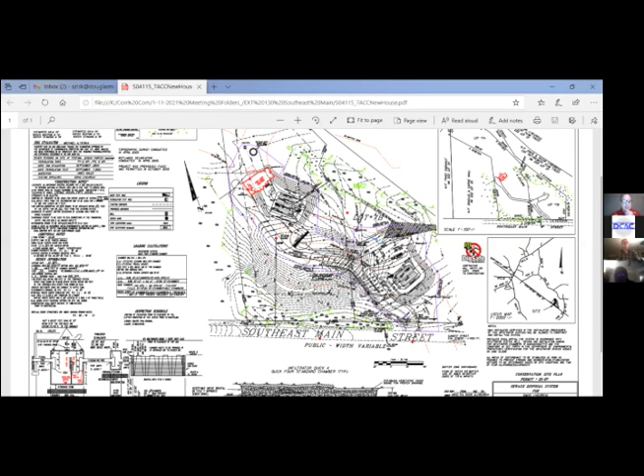And then Steve, your question? Yeah, so with this order, let's see if I can screen share. All right, is the plan showing on the screen? Yes. So there's actually 2 properties here.

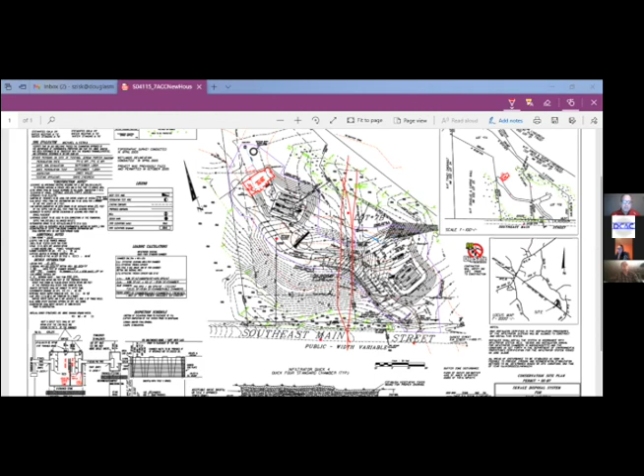You can see this line here, so there's a line right here. There's a property to the right with a shared driveway that comes up, and this to the right is the one where you just granted the extension. And this house here, when they did the permit - Margaret's not here to explain it, but basically they just did a box. They weren't sure what type of house they were going to build.

So I think everything else is staying the same, but instead they want to - here's the 50-foot buffer - they want to move the house, rotate it, and extend it a little bit, and build this type of house that's in red. I think what's hashed under that red was the original proposal. Let's see if I can highlight it. Wrong color - there's no additional grading. This is what was proposed before.

Do we want to know if she's going to be on tonight? I don't know if she's going to be on. She knows about the meeting because I asked her to attend, so maybe we can hold it off until later. Yeah, because we need to - I'll email her, I think.

What did you find? It seemed to push a lot of the impact towards the wetland with the driveway and the grading. Yeah, they're staying outside the 50-foot buffer, but there's no proposed change in the grading, so I don't know if there will be grading or not. Looks like a garage underneath, but she'll have to state her case if she wants it to be minor. We can't guess what they're doing because it looks like she just overlaid the red print - there's a garage under on the left side, but we can't tell just by looking.

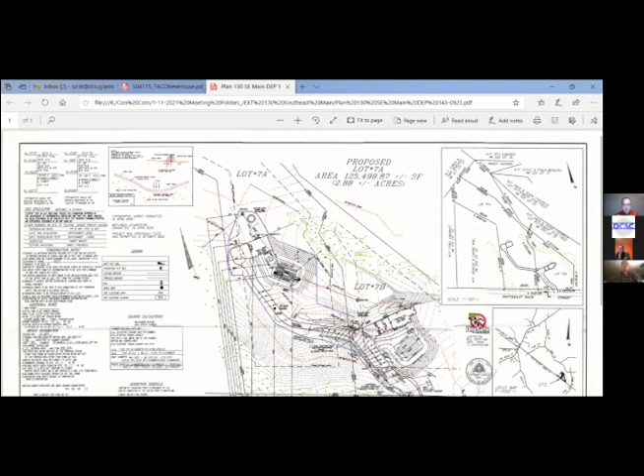Because it looks like she just set the new shape on top of the old shape. Here's the original plan - so it looks like they just moved it into this driveway area, and the driveway is smaller now. I think they put in a retaining wall - yeah, we'll wait. I'll email her to see if she can show up tonight. We'll put her at the end.

Okay, next one, certificate of compliance, 56 Lakeshore Road.

Steve, update. Are they here tonight? This was approved, I don't see him. Yeah, if I can speak up, can you hear me, folks?

Name and address. Hi, Robert Moran, I am a new owner of 56 Lakeshore Drive. Oh hi, how are you? Good, thank you, Madam Chair and members of the commission.

Steve, we talked a couple of times before and exchanged emails before we purchased. I'm new to Douglas, and this was a complicating factor to the purchase, but we worked through it. I'm here to attest that I saw the folks do the work, the guys out there with the machines, the silt fence and silt socks, and it looked professionally done. I'm not a trained engineer though, actually an electrical engineer.

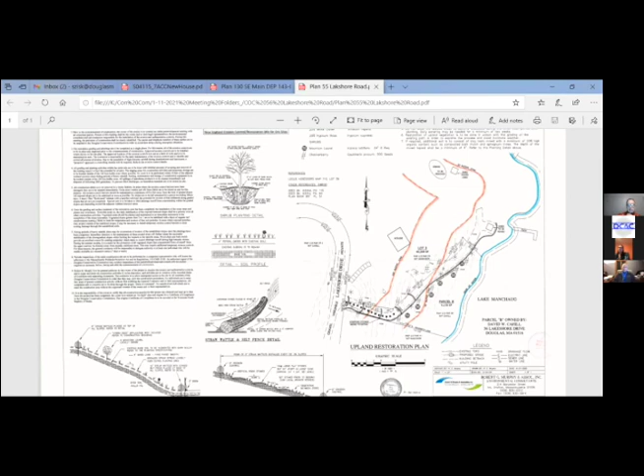Okay, thank you. Steve, did you request it, Bob, or did the owner request it? So you're the proposed owner, right? I am the new owner. You own the property. I do, I own 56 Lakeshore, and I believe there were orders on 56 and 55.

Is that right, Steve? Right, so I've got the plan up on the screen now. I think the Cahills must have just switched it, because they requested a certificate of compliance a couple weeks ago. I took some photos on this parcel, parcel B. I went out there and I have photos I can show. It looks like they did everything, but two things the commission usually asks for are an as-built and stabilization. Those were the two outstanding issues when I explained it to the Cahills.

Can you see the pictures on the screen? I also think the big thing is if we issue a certificate of compliance, that means the erosion controls can be removed. But you have to think, would any erosion occur? There's no grass growing, obviously, because they did the work in winter. And there was no as-built. So those are the photos I have.

Board, do we have any questions? Just real quick, is it Lakeshore Road or Lakeshore Drive? Drive. Is it Drive? Was there a road listed? Yeah, it's Road on the agenda but Drive on the plan. I think Drive is correct.

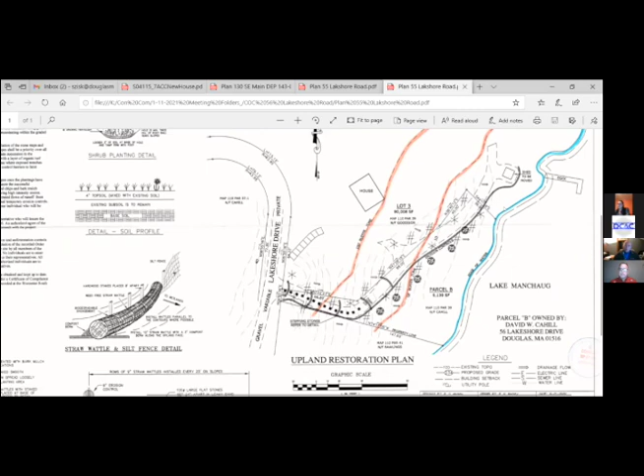I'm just looking at the plan. There's two different spots. All right, so that's got to start growing before we can issue our certificate. I defer to the commission. That's why I'm here, to just kind of be an observer of it. And it's in my interest to see grass growing there too.

Maybe middle way through springtime, give Steve a call if you think it's good, or send him a picture, email him a picture, and then we can revisit this and get you taken care of. So you can get all the erosion controls removed and all that jazz. Fair enough. Okay, thank you very much.

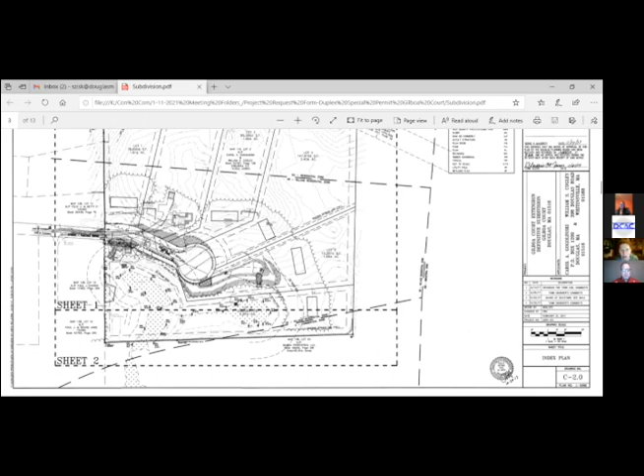Well, let me bring it up for everyone. To make it a little bit cleaner, they would file individually for those 2 bottom lots. Right, and they'd have to show, like, maybe I just don't see it. I don't see the buffer zone. Oh, maybe, there it is. Okay, so this, the one I have open, shows the driveways and what looks like the septics.

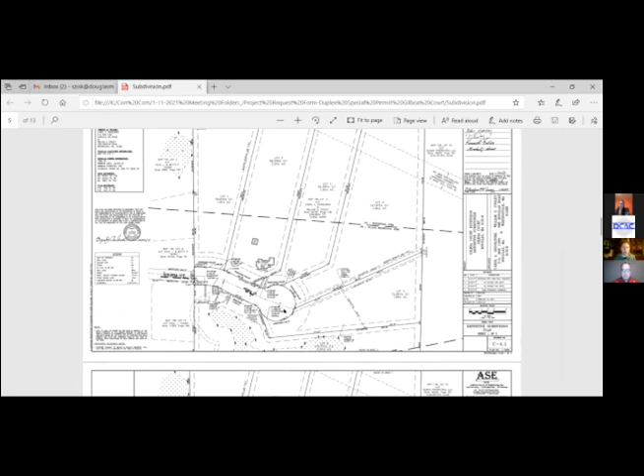There's an old plan that just had the roadway within our jurisdiction, and then you have the proposed house locations. So this one I've got with the houses and driveways has the septics outside our jurisdiction. Correct, yes.

No, that's the old one, but the old one does have driveways on it too. I've got the file in the Google Drive called duplex site. Yep, that's the one, bottom right. Yeah, this one.

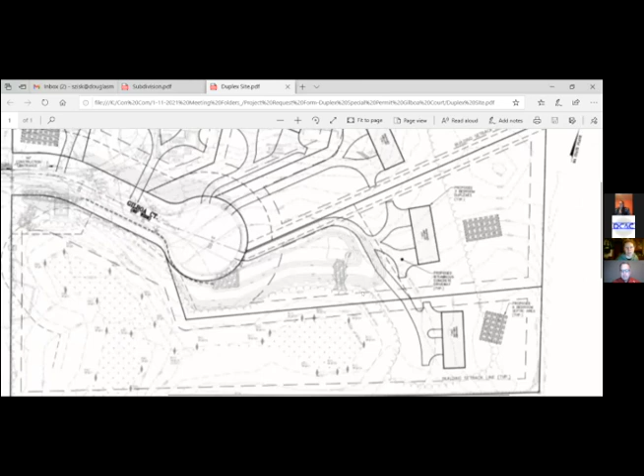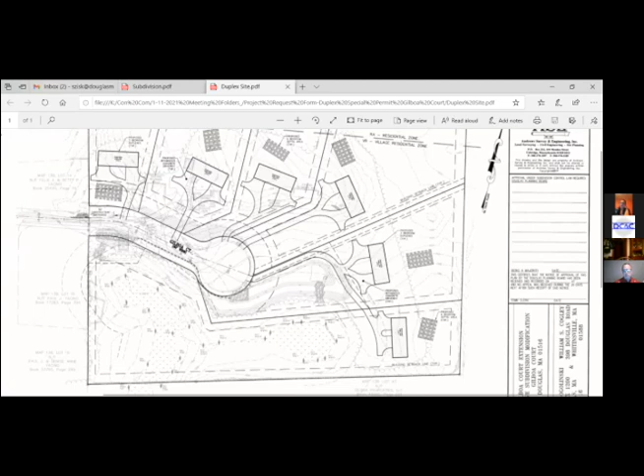So they've got septics, but they're outside of our jurisdiction. Just the fact that they're now showing the septics is new, we didn't have that before. Well, the subdivision, when they filed, even though they showed the houses, that was just for planning purposes, not permitting, because it was for the subdivision. Those houses approved under the conservation order of conditions for Gilboa for this project was for the street only. None of the houses, even though they showed on the plan and the plan was approved, would be exempt - they would still have to come back for each individual house if it was in the jurisdiction of the commission. So if this house in the bottom right is a single family or a duplex, they would have to file with the commission regardless.

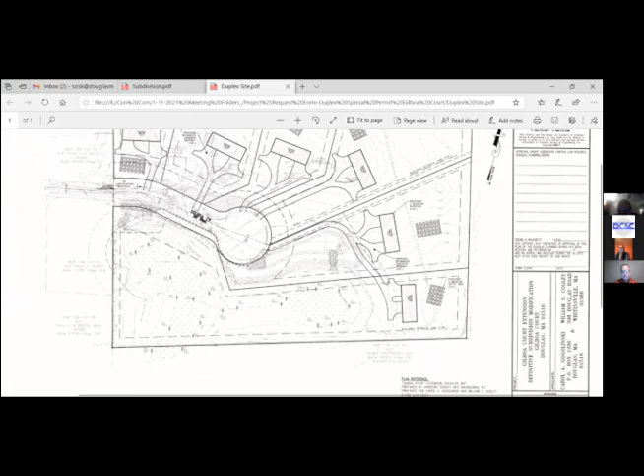So on the titled subdivision PDF. Okay, so Steve, you'll fill that out for me? Yes. Okay, moving along, picket fence.

I think they have, it was just the application. I think they're filing because it's hard to determine - I asked for more information. I think they put it in for the concrete patio that they poured. Right, so it's in the aquifer, right? In the aquifer, but I looked at the Google Maps aerials and it looks like it's outside the riverfront area, outside any jurisdiction of the commission.

Okay, so I don't see a plan. I didn't see a plan, just the application. Yeah, so it's really tough to see anything that's our jurisdiction if we don't have a plot plan. Well, let's see, I think - did I email that to you? Let me go check.

Okay, rendering impervious more than 20% of the lot area. Let me go on the GIS. Well, I really don't like to go on the GIS. We can just say if this falls within the riverfront or the buffer. We can't be looking things up and guessing on plans. I'm sure there's going to be a plan submitted to the planning board, right? You can say that, yeah - any work within jurisdiction of the commission, they need to file. We have no plot plan, so we don't know where any of the districts are or the resource areas - resource areas unknown.

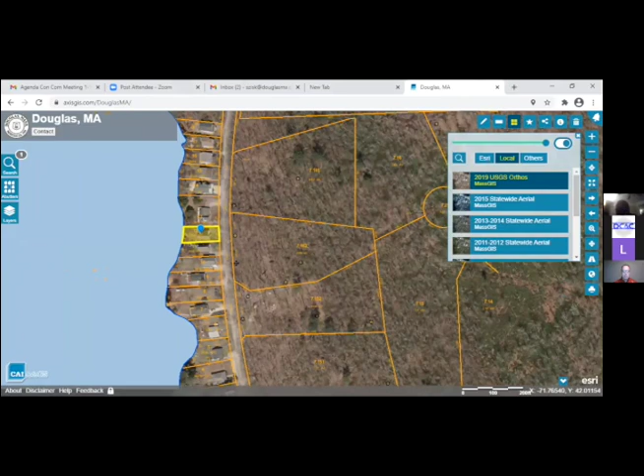Happy to meet you down there for any inspections. We were going to patch the process to repair the driveway. We're obviously building roadways on the solar site, so we were going to use the same material to patch the area of the driveway, pack it down, compress it, and create a bit of a berm to prevent any washout going down there again.

We can put a silt sock or one of the straw bales down there to prevent anything going down, just as best practice. And then just obviously clear up some of the sediment that had washed down onto her porchway.

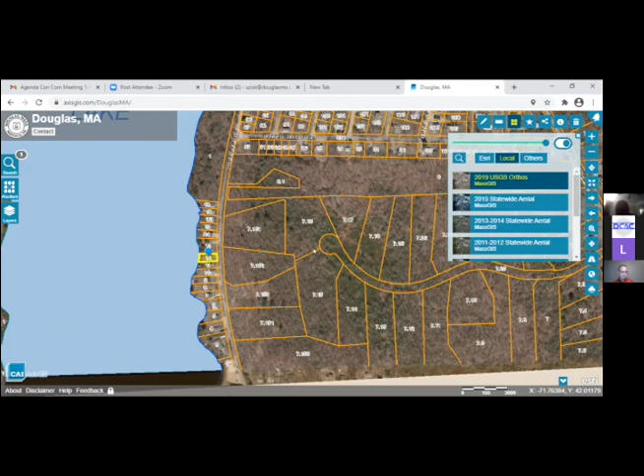So is this GIS up on the screen? Yes, so this is where the solar farm is, and they have it mostly cleared. Right after we had the large snowstorm earlier in the year, and then we had the 3 inches of rain, water was just pooling down Shore Road here.

And this area that I have highlighted is the person's house, which is probably at the low point of Shore Road. So water was just channeling down here and then took a right down into her driveway.

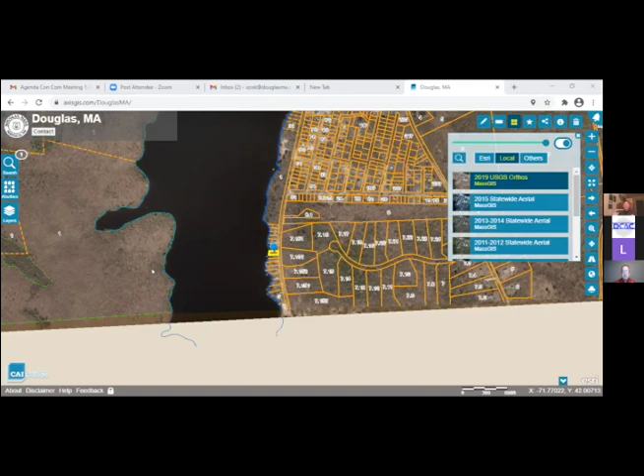Is this photo showing up now? No, we're still looking at GIS. All right, hang on, let me bring the photos up. I looked at the pictures in this file on the Google file, and I watched the small video. Yeah, so this is Shore Road, and then the water came down here, and it just eroded the house, the driveway out.

So the question is, can the gentleman from the solar farm, who is willing to come work with the town engineer and the highway department, just kind of repair this driveway? And so the question is, can they just go ahead and do it, or do they need to file anything with the commission? The car here is probably within the 100-foot setback, right where the car is.

I would say repair work should be handled without the need for a filing. Right, that's what we thought, but we just wanted to make sure the commission was aware of it. Nope, but I would also ask.

What is being done to keep this from happening again? I said, what can be done to keep this from happening again, or is it because the erosion protections within the solar farm were not installed as of yet? They've been installed.

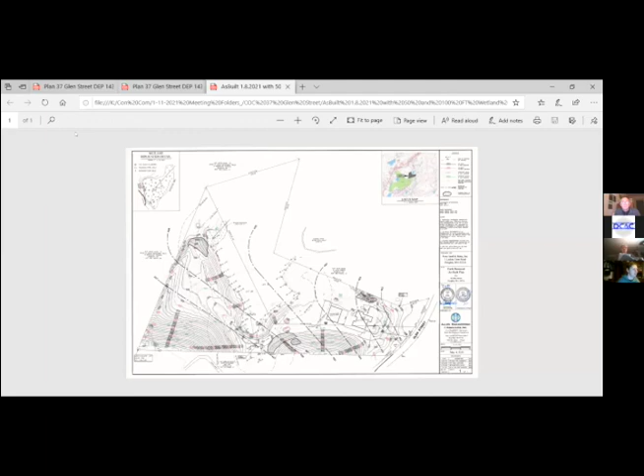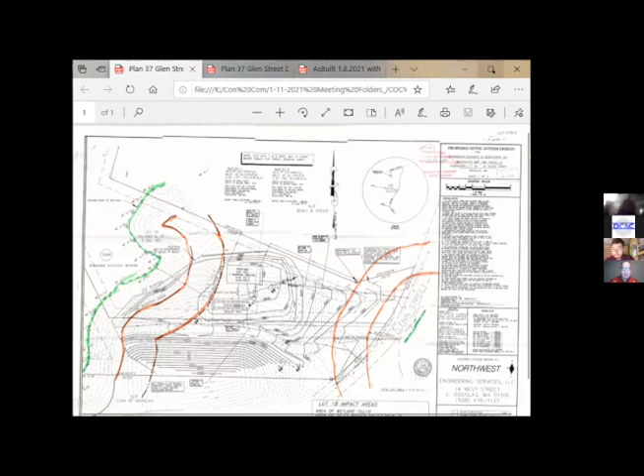Yeah, so let me bring up, see if I can bring up both plans, all three plans. Hang on. I hope this works, let's see. Okay. Can you see the plan on the screen? Yes, let's see if I get rid of the photo. I can. Yeah, okay, so you have this, I have this. Is this 748 or 749? This is 7, let's see. Let's see.

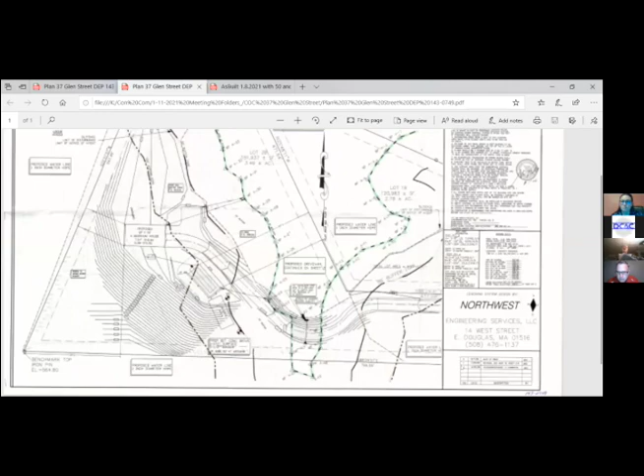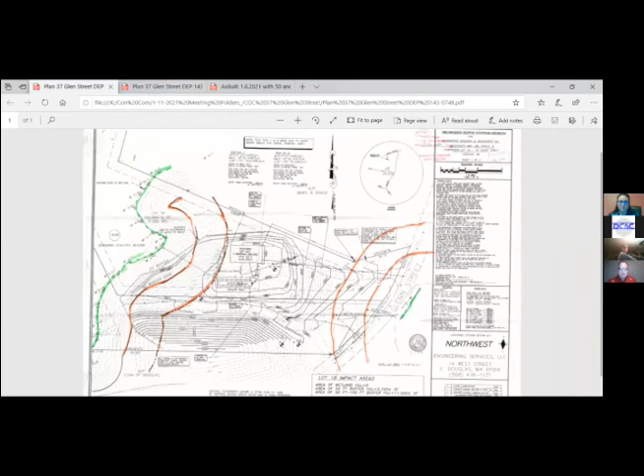This is 749, so this is 748. Here's Glen Street. Originally there were two plans: one for this house here for 748, and then there was actually a long driveway that comes back all the way to the back.

Which is this plan. They were gonna put a house way back. There's a little crossing here, and then way back into the lot at 749, there was gonna be a house. And if you go out behind the convenience store, there's a solar farm.

That's over here, that's what this area is, the old gravel pit. The owner combined both of these lots. They never built this house way back here. So they combined both lots, built the house in the front, took the gravel from here, reclaimed it, and built the replication area back here.

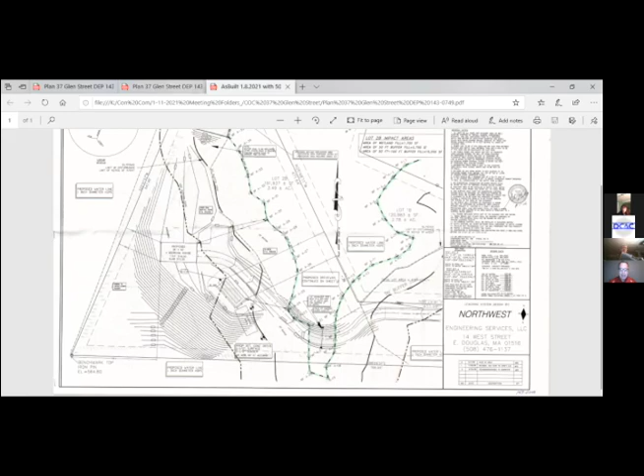So they're just gonna leave this all as an open area, and that's what this as-built shows. This as-built is for both lots, the first lot here, and they kept everything outside the 100-foot buffer. When you see my photos, there was a proposed house back here—they never built it. They took this hill down, restabilized it, and did the wetlands back here.

This is where they withdrew when they came in about a month and a half ago. They wanted—there was a little ungrown natural area here in front, right by the road. That's what the RDA was for. But they already had a couple order conditions.

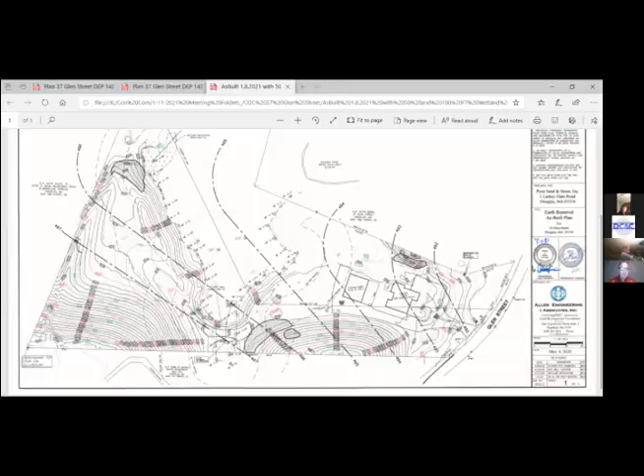So let me bring my photos up. These photos were taken sometime in the fall. I'll just kind of go through them one at a time.

So this is the beginning of the area. This is that area that they filed the RDA for today, that they just withdrew. We're going to keep it in its natural state.

This is the beginning of the road, that's that area. Are you going to double click on that? We can't see what you're looking at, we just see the thumbnails. Oh, it's not loading, sorry. That's okay. You see it now? Yep, there you go, alright good.

So this is that area that the RDA, they just withdrew. This is the beginning of the house. I'm gonna go through it. This is the construction inside of the slope right here.

This is the area, so they put a little area for the horse area. Everything else is stabilized. The side slope, they got riprap along the bottom. And now I'm coming down into this area where they had just a tiny little area of a wetland that they crossed.

This is where that second house was gonna be back here that they never built. This is the side slope of the wetland area. So this is the big slope in the back of the property. The house is gonna go up to my right.

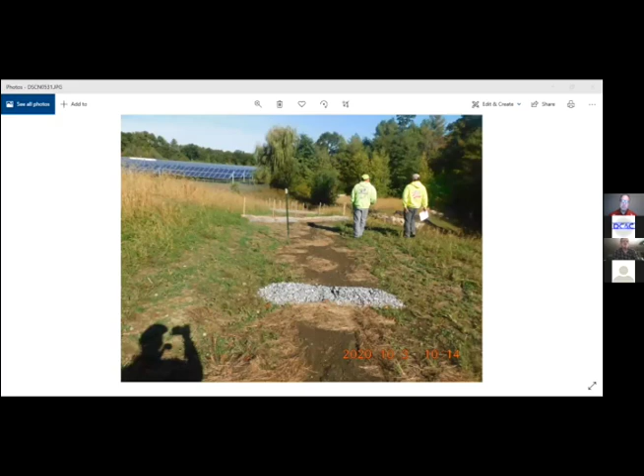This is the gravel pit behind the convenience store. Douglas convenience store is right here. That's that solar farm. This was done in October, so they put some check dams up here to help stabilize any area that was eroding back then.

And this is the replication area, and they had the plantings that were planted here, and the vegetation came up naturally. It was a low-lying area, there's a wetland back in here. And here's a look going back off towards where the other second house is gonna be—they never built it.

And so that's the entire site. I'll go back through them real quick so you can kind of see. Anytime they had an erosion issue, the owner—Adolphinese, I think, is one of the owners—he used to run a hydro seed company, which I was very happy for, because he was on top of the place and really did a great job keeping it stabilized.

What's your opinion of the work, Steve? Does it look good? It was great. I'd go out during the heyday every week, at least weekly, when they were stabilizing it, and anytime I had any questions they got right on top of it. So right now it's really well established. And is the mitigation area the size that was proposed and looked like it would be? It looked good—what was nice is that it was already growing.

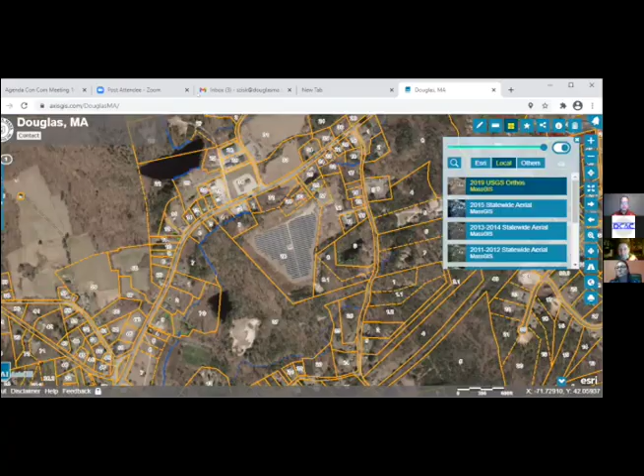And that open space that was reseeded with grass, was that all part of the plan that was going to stay open? Yes, it was supposed to be the second house lot, and they combined both lots, so they got rid of the potential of putting a house back there. No, I get that, it's just not knowing what the original plan was.

It just seems like a very large area of disturbance, just trying to get a handle on it, I guess. I think they took the gravel. Right, they wanted the gravel, and then they proposed the house, and they were going to put the house back there. And I think the owner of that — right, and I feel like, so I'm approaching this the wrong way, but when you're dealing with a gravel pit, the idea is when you're done, you restore the space.

And I would just expect more trees — this seems like an awful lot of grass. But if the original plan was to put lawn and driveways and other stuff in instead of replanting, then that's what the plan was, and that's what was approved, and then they're in compliance. Well, I think they might be putting horses back there to pasture, so they'll use the flat land for that.

Yeah, at the end of the day, it's not what I would expect, but I didn't see the original plan, and as long as it's compliant with the original plan, then we're good. Without a doubt. We've gone through planning board and everything, and we've got sign off from Bill and that group as well.

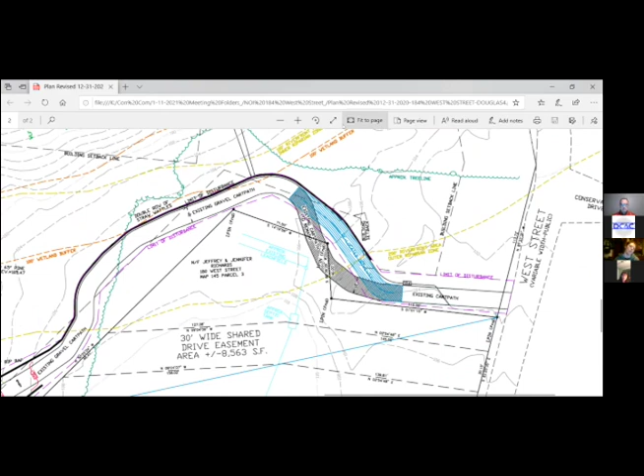How much riverfront area disturbance do you have? The riverfront area is on there, it's in like a gold yellow color. That's the 200-foot outer riparian, and the 100-foot is the other yellow line. The wetland line is in orange, the hundred-foot buffer, I mean. The wetlands themselves are in green. Good, yeah.

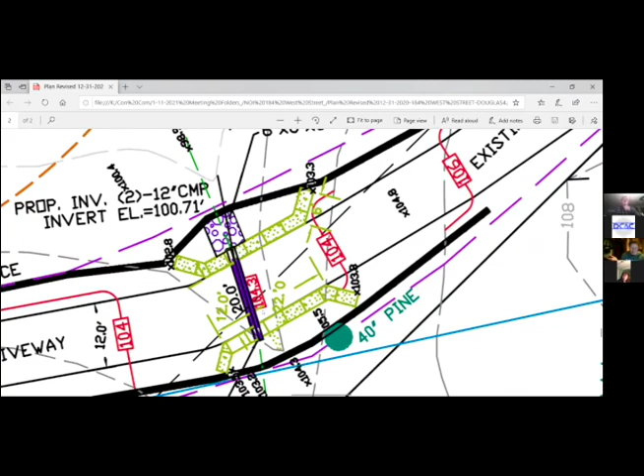I walked the site and this looks like what I saw. Sorry, just to clarify, is it one or two 12-inch pipes in there? Two 12-inch pipes, side by each? Side by each. There you go. Well, okay, so I see only one line on the diagram and my brain was like, did she put one on top of the other? I thought that was crazy. But I thought it was really nasty, wide line. See, there's two. I just be like, look, there's one on top. Yeah, I just thought that would be crazy, but I don't know. People do crazy things sometimes.

Okay, perfect, great. Okay, so, I'm just thinking of it. You don't think there's any issue of those being blocked? I just have this fear that if the water's coming through there, and I know it's not fast, it's a swale of water, it's not just going to push a pile of pine leaves in there and get it clogged.

I would hope it doesn't. I mean, we all hope that. But, what would you propose? Would you propose a little bit of riprap before it? I would actually, I can do that. As much as I hate riprap, I feel like this is the place where it's appropriate. I'll agree with you, there's pine needles there, quite a bit of them, and I'll entertain that. Okay, board, anything else?

The applicant proposes this is a swale. What's the difference between a swale and an intermittent stream? It doesn't have any vegetation, and since the last filing in 2003, the hydrology has changed out there, so it's no longer an intermittent stream at all. It doesn't hold water, it doesn't have a true stream channel to it. It's got more like a drainage channel, like you can see where it's just eroded the soil as it's gone down, but it doesn't sustain that.

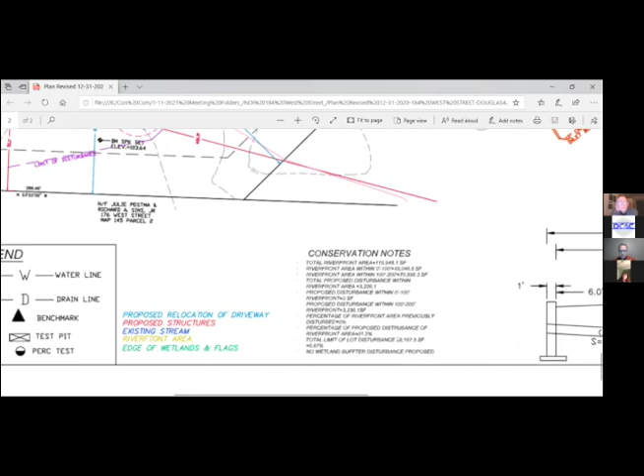I think it was on our comments last time—did you put those calculations on the plan? I did, they're right there on the bottom. So what's the percentage of that? The percentage is 6.87% disturbance. Oh, right here, okay good. So just so the commission knows, the most you can disturb is 10%.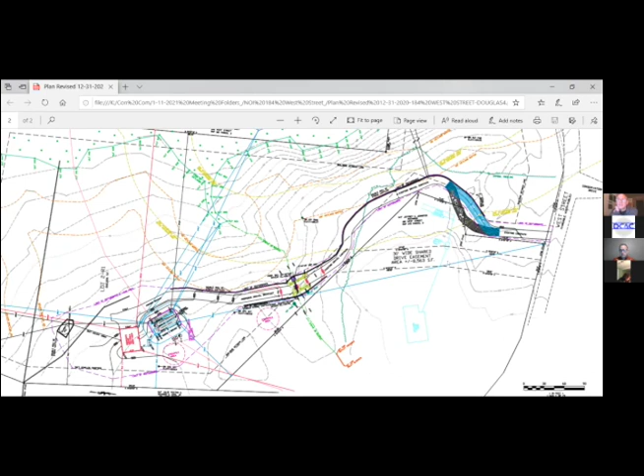Has there been a check to see if there's any species or habitat issues with this? There is habitat. We filed with them and got notification back that they're okay with this plan. They're good with the plan.

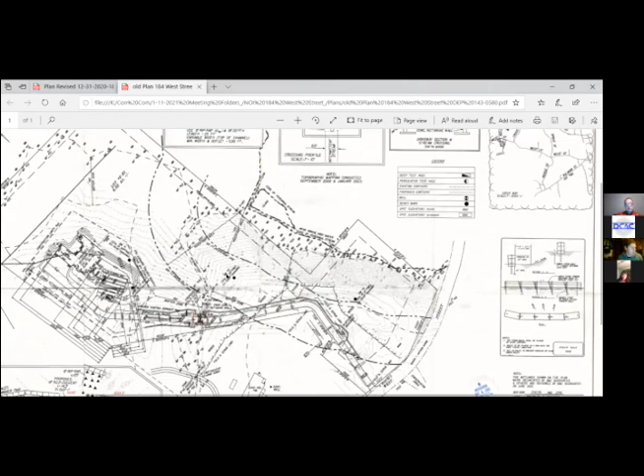So there's a corrugated metal pipe that crosses somebody's driveway. It has been crushed and you can't even see the inlet to that corrugated pipe. It's on my plan in red, I located it, it shows that pipe. The inlet to that pipe is completely blocked, you can't even find it.

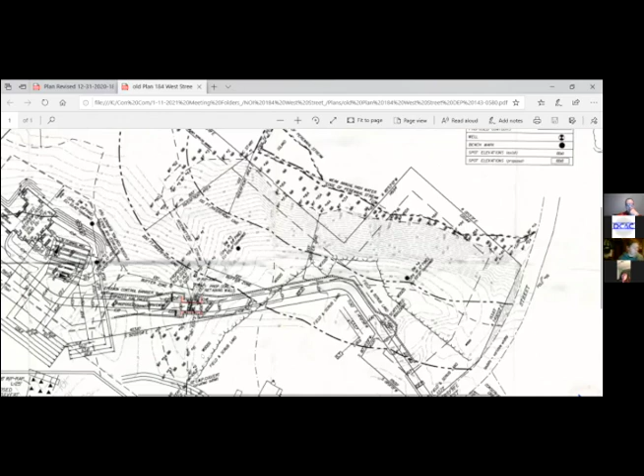What's on the other side of that inlet is pretty much like a pile, almost a man-made area, and that's where that water is coming from. It's like people have pushed the earth one way and pushed this backyard another way and created a wetland up there. There was probably a much bigger wetland up there at one time, but it has changed over time.

Yeah, I mean, it's the intermittent stream they have on the plan, labeled down gradient, because I colored the old plan. I don't know if I could, let's see if I can color it.

So they have the wetlands right here, big, right. And then they have a wetland that kind of comes like this on the old plan. This area here, on this plan, they're not calling that a resource area.

Because this is F6 here, it's almost like the flag stop. It's hard to see it because it crosses an existing cart path. So it's hydrically connected.

For me, it's hard — I didn't really notice it when I walked out there in the middle of summertime. I walked through this area and did not see that this was a bank I was climbing over. It wasn't until I got down into this wetland and walked up that I noticed this was eroding, and then through here.

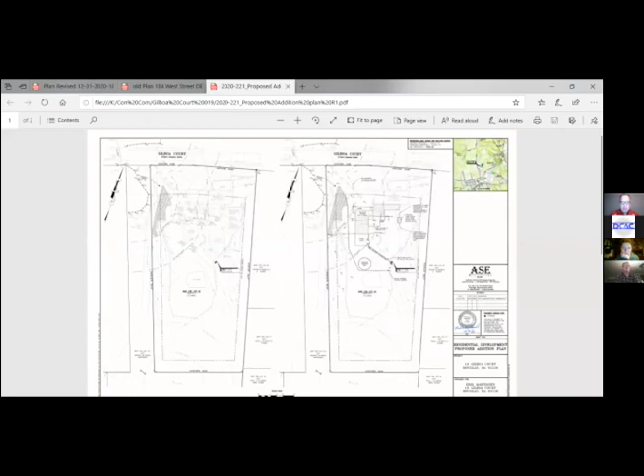Is this it here? Let's see this. Does this look like- yes, that's the revised one.

Okay, so do you want to just summarize the changes that you've made with our comments from the last meeting?

Yes, so continuing from last time, we didn't have a DEP number yet. We have a DEP number now: 143-1006. We also added flow lines to make it

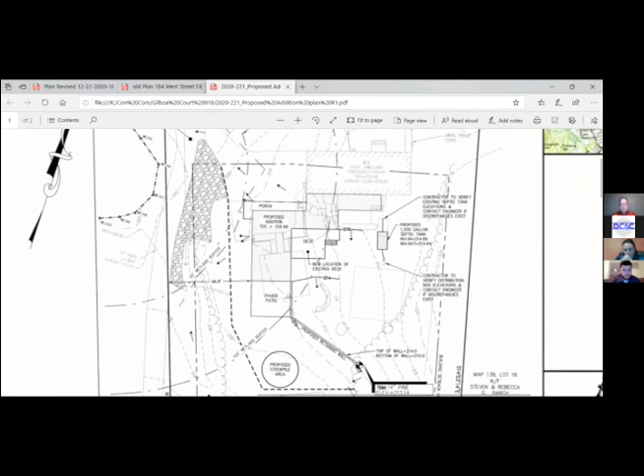a little easier to read where everything is actually flowing. The driveway continues to flow in that same direction as before, really once you get past the porch. I explained it last time, but now we can actually see it. Everything will flow to that southwest direction from the proposed addition.

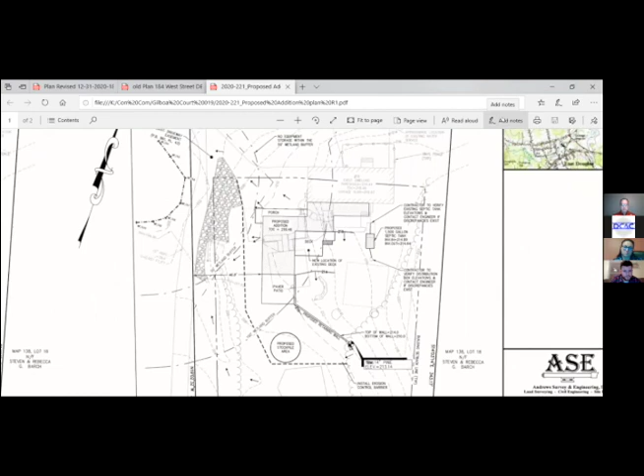You can see it flows to that HDPE pipe down at the bottom of that riprap. In the bottom left corner of the plans, you can see the swale where everything will head towards that pipe. Also, when you look at it, it makes it easier to tell.

I know there were issues, or you just wanted me to bring to the attention of Rich, the PE, about making sure that from the proposed addition, no runoff will be going towards that addition.

With those proposed contours, you see that 214 and 216, the 214 on the deck, yep, right there. All of that runoff will be going down towards there. The top of the wall there is at 214 of that retaining wall.

And at the bottom, you can see the 212 where we have the proposed line, right back where that benchmark is, that goes at 212. So everything will be moving down the backyard.

And then when you see the existing contours moving west or southwest-ish, they all flow towards that swale in the bottom left, and everything will go down towards that pipe and into the wetland.

We also added that stockpile area that is outside the 100-foot buffer. It's right there. And we moved the erosion control backwards just so it would cover past that proposed stockpile area.

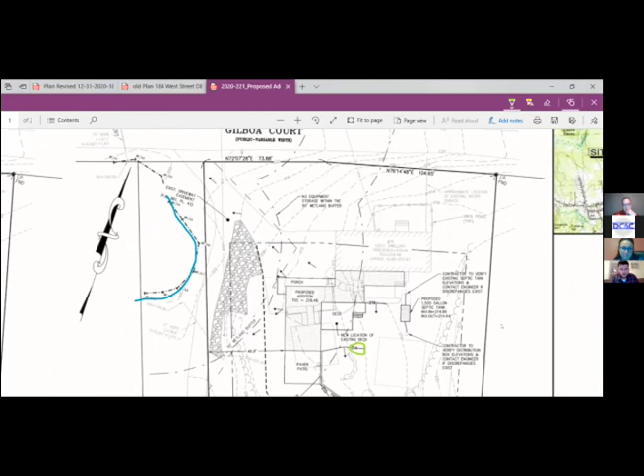Let's see, what else? You also, I had the net impervious previously, but you wanted an actual breakdown to show what the existing impervious area is within the 100-foot buffer area and what the proposed is. If you look at the top right of our plan, I actually highlighted the existing conditions and the proposed conditions with a net of 415 square feet.

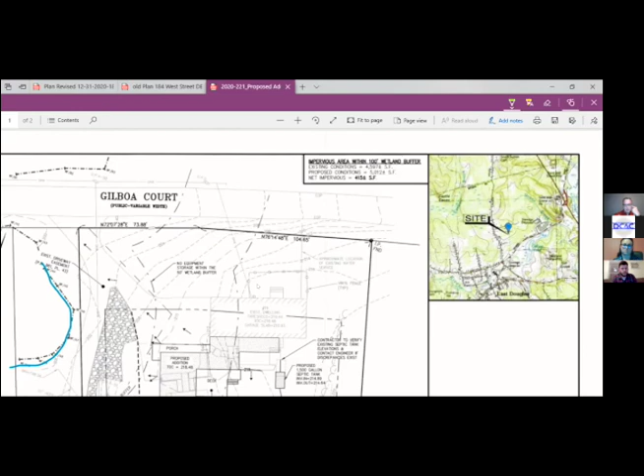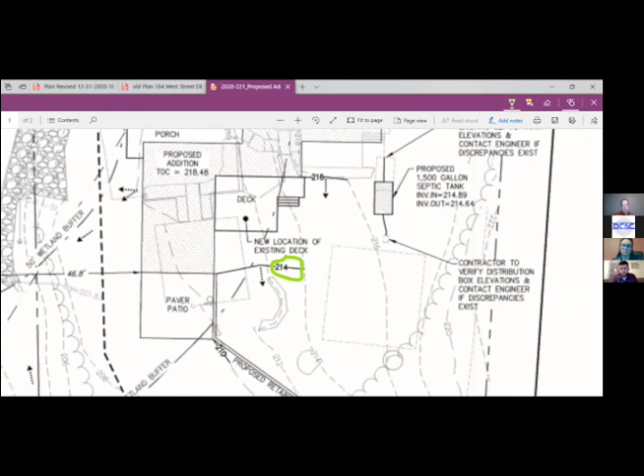In that net impervious, I know we discussed possibly using a CN number for the patio area because there may be some pervious area, like the cracks in between. After talking with the client, we wanted to make sure we were conservative with our net impervious area, so we called that at 100% impervious for now, just to be conservative with that.

And that's basically, now that we're at the 415, the area of that patio within the 100-foot buffer is 429 square feet. So with the nets, everything else within there, there really isn't any net impervious due to that basketball court and the walkways. We're taking that driveway area out where the proposed addition is in the porch, so really the only net impervious is just that paver area, and that's also a conservative number for that.

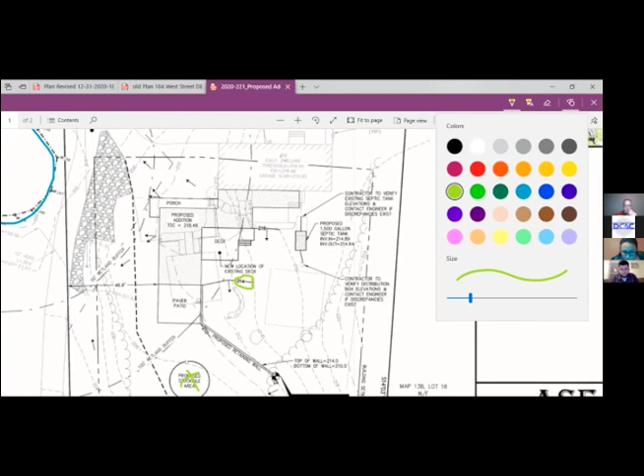That 400 net impervious, just due to us not exactly sure what he wants to use, we figured we'd just be safe with that. Other than that, from Tracy, from your checklist that you gave me last time, I think that included everything.

He was gonna do a video on this one, wasn't he? Really? Did I do a video? We talked about it the last meeting. Was I going to do a video? No, maybe I was, Steve was. He can go really fast with the pictures. No, I don't have a video on this. Only one person got that. No, that'll do.

No, I have that in my notes, sorry. I got the photos.

So board, let's go. Could you pull up the plan one more time, Steve? After you're done with the pictures, if you want. So the proposed erosion controls during construction.

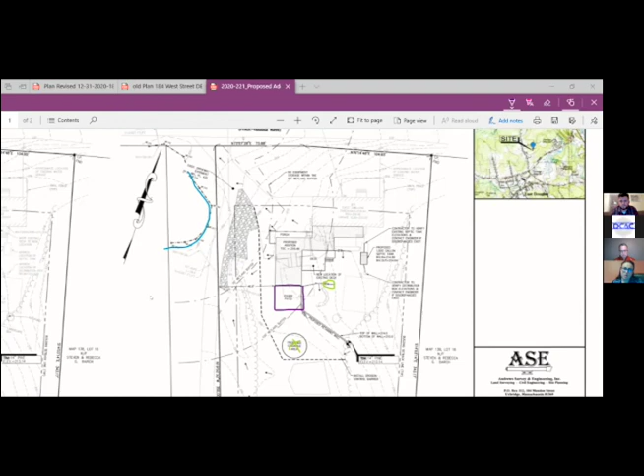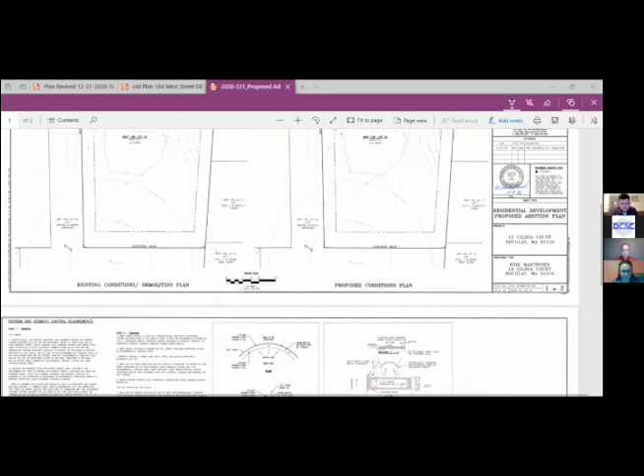So how do you plan to install the erosion control in the driveway? And what are you proposing? Because I can't see the whole plan. Material - if you look down below, you can see the leader, I think it's on the bottom. The erosion control we're using, if you look at the detail, I believe it's a straw wattle that we're going to use. I can't read it. Yeah, straw wattle.

Okay, so you know where I'm going with this, right? Yeah, so I think I extended it too far. So either we do like a compost sock blown in maybe, that can lay on the concrete or on the pavement. We just want to ensure that no erosion's gonna head that direction during construction. Yeah, we can make sure we add that. It says you said straw wattle or filter sock.

I mean, the filter sock's probably gonna be a bit heavier. I don't know, Steve, what your opinion is, but filter sock would be more stable - harder to move. So just concerned just during construction on the erosion occurring across the driveway. Yeah, we could change it to that for the driveway.

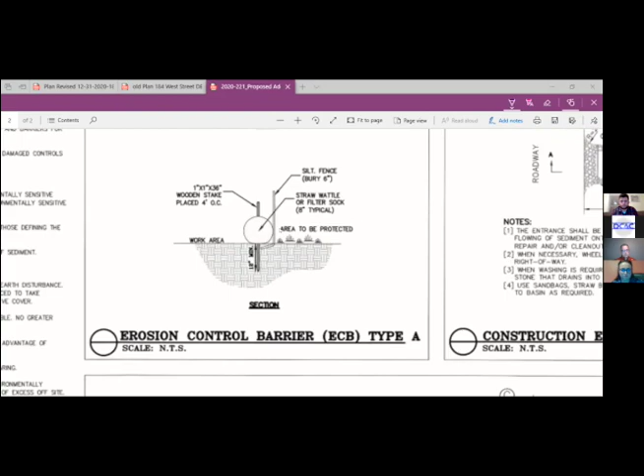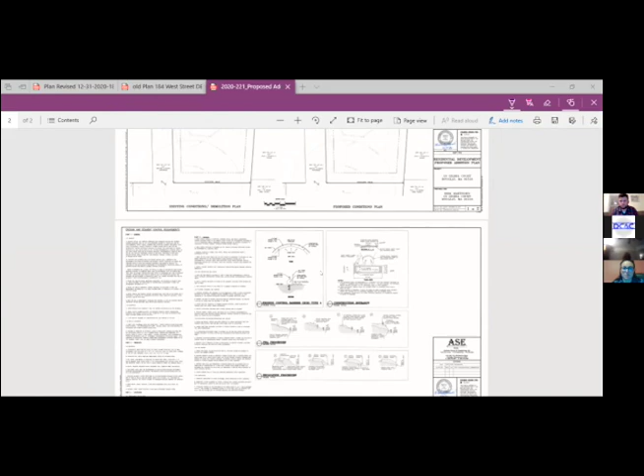And then I don't think you're staking in a stake through that compost sock either. Yeah, I probably should have realized that with the driveway. Sorry about that. That's all right. So that's probably the most sensitive spot of the whole project. So we just want to make sure that there's a suitable erosion control. Steve's going to be called out before any ground work is done, any excavation is happening.

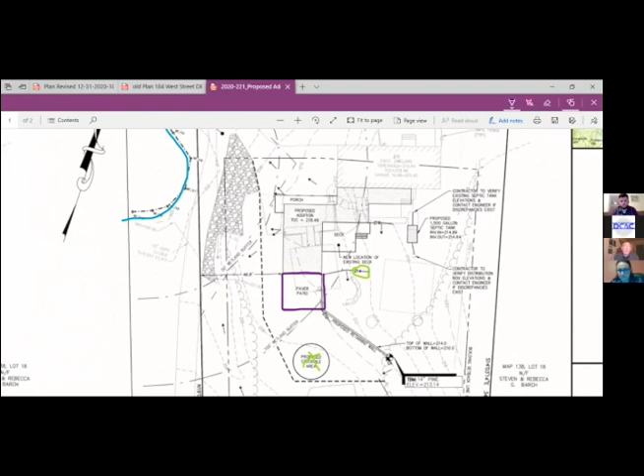Board, any other questions? Should there be any erosion control on the right side of the driveway as you first come in off the road, where the driveway spills out and goes towards the wetland? I see arrows going that way. Yes, correct, right down in that area.

Isn't there a catch basin there? Yeah, if you see it, it won't go all the way towards - only that arrow there, that's the only real area that will be going into the street. Anything from our side of the street will be going into the wetland to the left, or the west. It's not going to make it to the street.

No, we're talking about the west one. Right, so on the left side as we're looking at it, it just seems to me like there should be some additional erosion control right where the arrow is now. We could add that if...

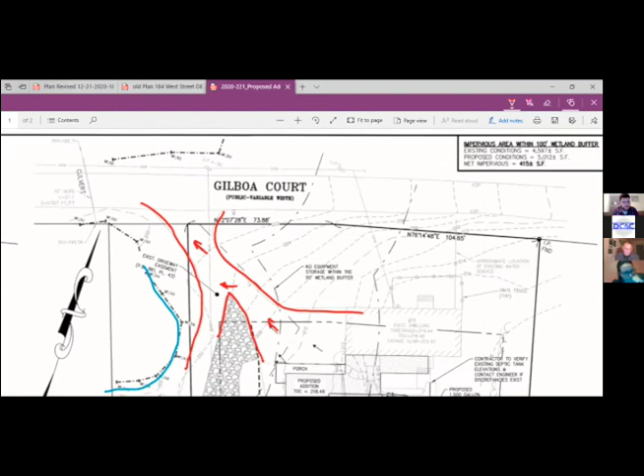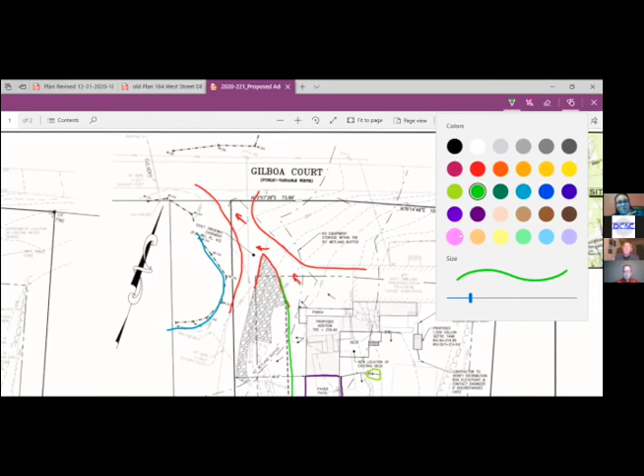Well, the erosion control is this it, right? It ends right here, it only ends there, right? And the water's all going down the driveway, and then it comes off the driveway and goes towards the wetlands, so. We could bring it around and maybe close the entrance at night.

Because where do you stop really? I mean, you're not supposed to have any erosion off of a site into the street anyway. So maybe if we propose to cut off that driveway exit at nighttime...

We could do that. I don't think anything from past where that riprap is, where he has that second arrow pointing left - it's not going to the street, but it is going towards the wetland. So we could put an erosion control maybe right there, so it won't go towards closing off the wetland.

Chance, because you do have your arrows of flow. We don't know where it's flowing - you're showing us where that's flowing. Yep, so I could extend that erosion barrier where his green lines are. I could extend it. Yeah. You can just put another one off, inside this driveway too.

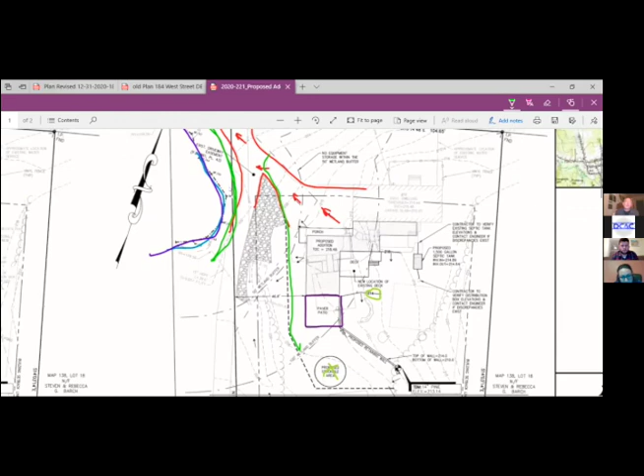Right, that's where I really want to see some. Is that your property? That is not our property. Okay, well, we're right at the arc there where it is on your property. Right there. Oh, are you talking about the green or the red? Green.

So just inside the red. Well, here's the driveway - I mean, is it a shared driveway? It is a shared driveway. I mean, would the neighbor allow you to put the erosion control here? The neighbor, I believe, might even be his brother. So as long as there's no family feuds, I think...

Well, can't be sure of that. Yeah, you never know, but I'm pretty sure. I wouldn't want to get in the way - I would hate to flip off of this plan, but I don't want to get in the way of the neighbor's driveway.

It's not the driveway easement. Yeah, with that green line to the left, that would not be - I think maybe that far, like the right side of that arc might be, but for the majority, that wasn't, that driveway goes into our lot.

I think we're going a little bit out of scope, to tell you the truth.

I see, so the riprap, I think you still are gonna have a little trouble staking that in. But if you go across and stake it to the lawn area of the front yard, you can't put it right here. Hold on, I'm looking at the pictures. Can you bring it up again? Is mine on the screen? No, sorry.

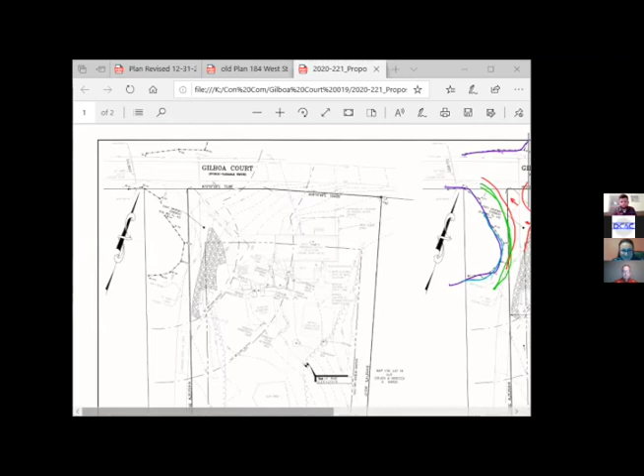Oh, here we go. Are you drawing anything? Let's see. So it's gonna be erosion control along this side here. Yep. And then it's gonna come follow this where he has it. And I think it's gonna cut off like this.

Maybe a little bit closer to the back left corner of the existing garage. Yeah, I was going to say, yeah, just so they can actually have access to the garage. Right here, right. I think that's perfect, that looks so perfect.

Anything's gonna come this way, hopefully. Yep, you want to direct it to that riprap off of the driveway, right here. And if it flows off here, then it'll hit this secondary erosion control also.

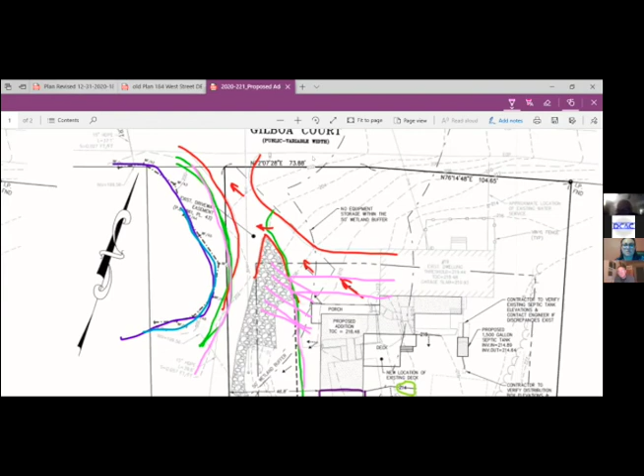Okay, board, anything else? Art? No. Mike? Nope. Mark? No. Nothing. Eric? No. I'll entertain a motion to close the public hearing.

Oh wait, no one in the public. Anybody in the public? No, I don't see any. Douglas Cable. Oh, you are. Yeah. All right, I'll entertain a motion to close.

So moved. Motion's made, seconded by Katie Grace. Roll call vote. Art Monmany, aye. Mike Greco, aye. Eric Harris, aye. KG Dudley, aye.

Mark Manjamai. Okay, I'll entertain a motion to issue with the conditions that we spoke about, subject to a plan submitted to Steve before any erosion controls are installed.

So moved. Motion made, second by Mike, roll call vote. Art Monmany, aye. Mike Greco, aye. Eric Harris, aye. KG Dudley, aye. Mark Manjamai. Okay, very good.

So Matt, you are very clear on what you need to get Steve. Yep, just took a picture of his beautiful drawing, so I'll make sure I'm good. I'll send you a bill. Thank you very much. All right, thank you everyone. Have a good one. You too.

Thank you. Steve, anything else? Well, do we just, for tonight? Yes, yes, okay. Got all that Joseph Road stuff? Oh yeah, well, we have to continue, or maybe not even continue. They never advertised, so technically they didn't open.